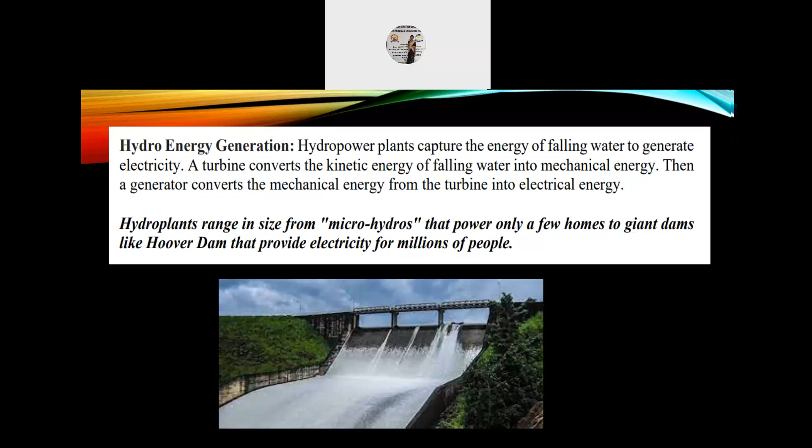Parts of a hydroelectric plant: most conventional hydroelectric plants include four major components. The first is the dam, which raises the water level to create falling water and controls the flow of water. The reservoir that is formed is in effect stored energy.

Number 2, turbines. The force of falling water pushing against the turbine's blades causes the turbine to spin. A water turbine is much like a windmill, except the energy is provided by falling water instead of wind. The turbine converts the kinetic energy of falling water into mechanical energy.

Number 3, generator. Connected to the turbine by shafts and possibly gears, so when the turbine spins it causes the generator to spin also. It converts the mechanical energy from the turbine into electric energy. Generators in hydropower plants work just like the generators in other types of power plants.

Number 4, transmission lines, which conduct electricity from the hydropower plant to homes and businesses.

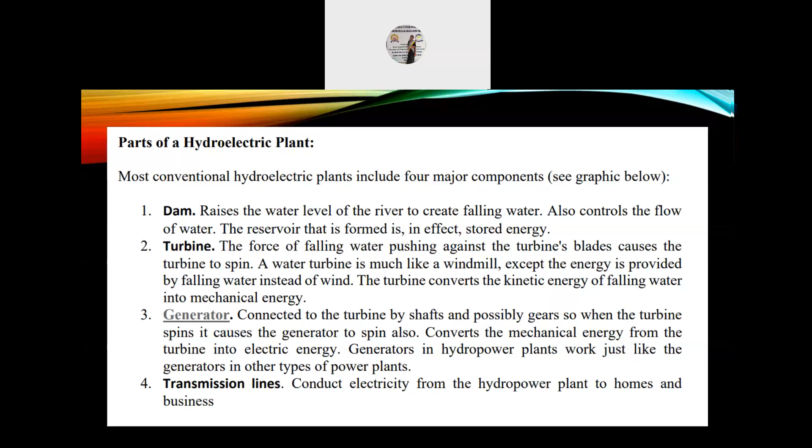How much electricity can a hydroelectric plant make? The amount of electricity a hydropower plant produces depends on two factors: how far the water falls and the amount of water falling.

For how far the water falls, the farther the water falls, the more power it has. Generally, the distance that the water falls depends on the size of the dam. The higher the dam, the farther the water falls and the more power it has. Scientists would say that the power of falling water is directly proportional to the distance it falls. In other words, water falling twice as far has twice as much energy.

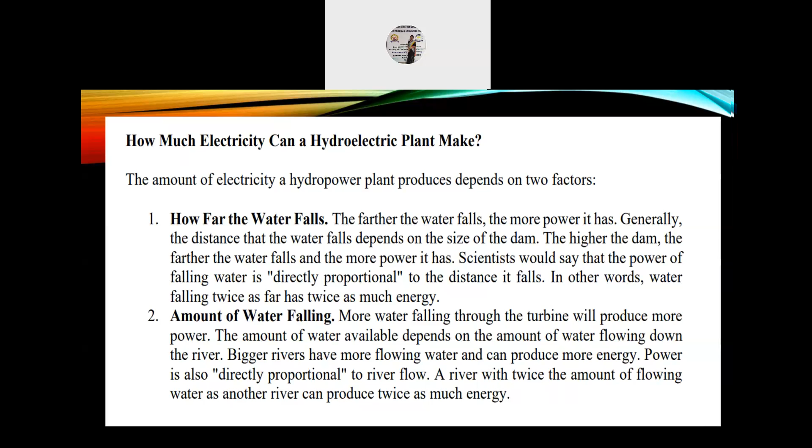Amount of water falling: more water falling through the turbine will produce more power. The amount of water available depends on the amount of water flowing down the river. Bigger rivers have more flowing water and can produce more energy. Power is also directly proportional to river flow. A river with twice the amount of flowing water as another river can produce twice as much energy.

Concentrated solar power systems use lenses or mirrors and solar tracking systems to focus a large area of sunlight into a small beam. Photovoltaic cells convert light into an electric current using the photovoltaic effect.

Photovoltaics were initially solely used as a source of electricity for small and medium-sized applications, from the calculator powered by a single solar cell to remote homes powered by an off-grid rooftop PV system.

Commercial concentrated solar power plants were first developed in the 1980s. As the cost of solar electricity has fallen, the number of grid-connected solar PV systems has grown into the millions, and utility-scale photovoltaic power stations with hundreds of megawatts are being built.

Solar PV is rapidly becoming an inexpensive, low-carbon technology to harness renewable energy from the sun. The current largest photovoltaic power station in the world is the Pavagada Solar Park, Karnataka, India, with a generation capacity of 2050 megawatts.

Wind wave energy generation. Wave energy, or wave power, is the transport and capture of energy by ocean surface waves. The energy captured is then used for different kinds of useful work, including electricity generation, water desalination, and pumping of water. Wave energy is also a type of renewable energy and is the largest estimated global resource form of ocean energy. It is also known as ocean energy or sea wave energy.

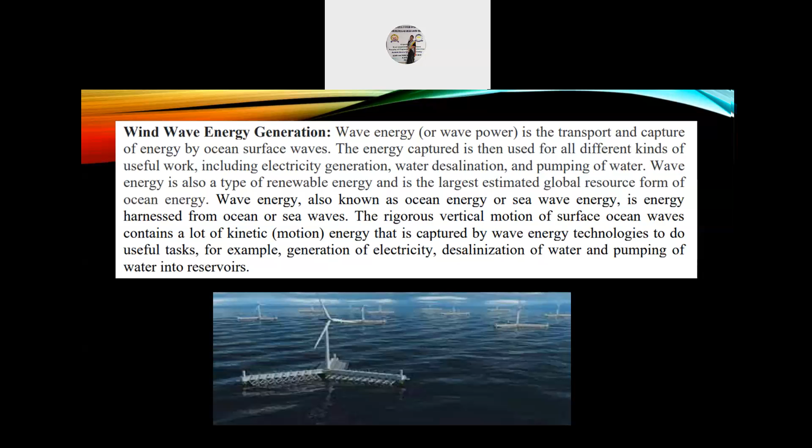It is energy harnessed from ocean or sea waves. The rigorous vertical motion of surface ocean waves contains a lot of kinetic or motion energy that is captured by wave energy technologies to do useful tasks, for example generation of electricity, desalination of water, and pumping of water into reservoirs.

Wave energy, or wave power, is essentially power drawn from waves. When wind blows across the sea surface, it transfers the energy to the waves. They are a powerful source of energy. The energy output is measured by wave speed, wave height, wavelength, and water density. The stronger the waves, the more capable it is to produce power.

The captured energy can then be used for electricity generation, powering plants, or pumping of water. It is not easy to harness power from wave generator plants, and this is the reason there are very few wave generator plants around the world.

There are multiple different technologies used for wave energy, with 5 main types of technology used, including absorbers, attenuators, oscillation water columns, overtopping, and inverted pendulum devices.

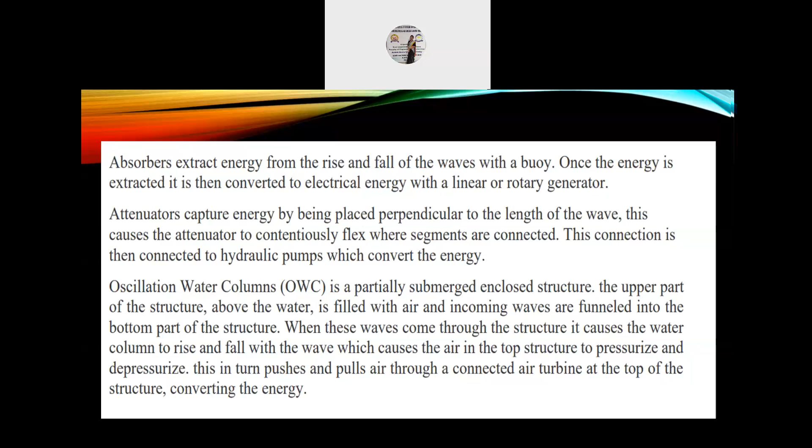When these waves come through the structure, it causes the water column to rise and fall with the wave, which causes the air in the top structure to pressurize and depressurize. This in turn pushes and pulls air through a connected air turbine at the top of the structure, converting the energy.

Overtopping has a wave lift over a barrier which fills a reservoir with water and is then drained through a hydro turbine. This technology is very similar to a conventional hydropower dam.

Inverted pendulum device uses the motion of waves to move a hinged paddle back and forth. The motion of the paddle drives hydraulic pumps, which drive electrical generators.

Next one is tidal energy generation. Tidal power or tidal energy is the form of hydropower that converts the energy obtained from tides into useful forms of power, mainly electricity. Tidal energy has potential for future electricity generation.

Tides are more predictable than the wind and the sun. Among sources of renewable energy, tidal energy has traditionally suffered from relatively high costs and limited availability of sites with sufficiently high tidal ranges or flow velocities, thus constricting its total availability.

However, many recent technological developments and improvements both in design and turbine technology indicate that the total availability of tidal power may be much higher than previously assumed, and that economic and environmental costs may be brought down to competitive levels.

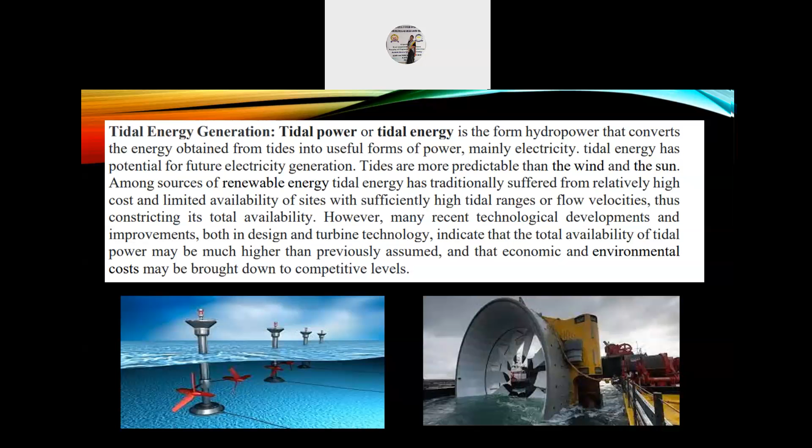Tidal power is taken from the Earth's oceanic tides. Tidal forces are periodic variations in gravitational attraction exerted by celestial bodies. These forces create corresponding motions or currents in the world's oceans.

Due to the strong attraction to the oceans, a bulge in the water level is created, causing a temporary increase in the sea level. So as the Earth rotates, this bulge of ocean water meets the shallow water adjacent to the shoreline and creates a tide.

This occurrence takes place in an unfailing manner due to the consistent pattern of the moon's orbit around the earth. The magnitude and character of this motion reflects the changing positions of the moon and sun relative to the earth, the effects of Earth's rotation, and local geography of the sea floor and coastline.

Tidal power is the only technology that draws on energy inherent in the orbital characteristics of the Earth-Moon system and to a lesser extent in the Earth-Sun system. Other natural energies exploited by human technology originate directly or indirectly with the sun, including fossil fuel, conventional hydroelectric, wind,

biofuel, wave, and solar energy. Nuclear energy makes use of Earth's mineral deposits of fissionable elements, while geothermal power utilizes the Earth's internal heat, which comes from a combination of residual heat from planetary accretion and heat produced through radioactive decay.

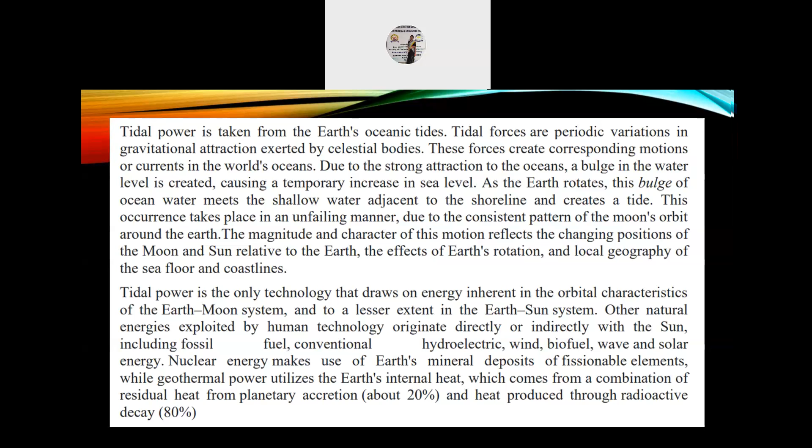A tidal generator converts the energy of tidal flows into electricity. Greater tidal variation and higher tidal current velocities can dramatically increase the potential of a site for tidal electricity generation.

Because the Earth's tides are ultimately due to gravitational interaction with the Moon and Sun and the Earth's rotation, tidal power is practically inexhaustible and classified as a renewable energy source.

Movement of tides causes a loss of mechanical energy in the Earth-Moon system. This is the result of pumping of water through natural restrictions around coastlines and consequent viscous dissipation at the seabed and in turbulence. This loss of energy has caused the rotation of the Earth to slow in the 4.5 billion

years since its formation. During the last 620 million years, the period of rotation of the Earth has increased from 21.9 hours to 24 hours.

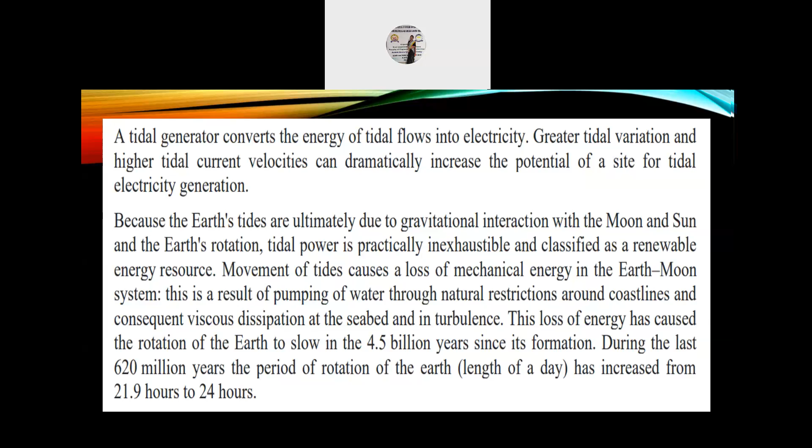The last one, geothermal energy generation. Geothermal energy is the thermal energy generated and stored in the earth.

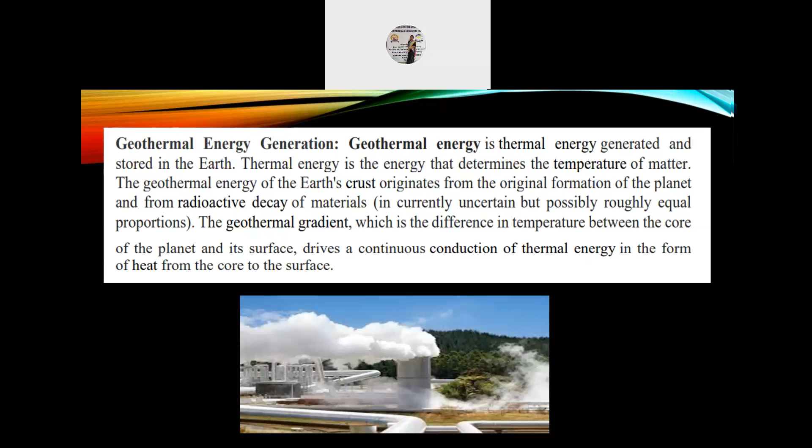Thermal energy is the energy that determines the temperature of matter. The geothermal energy of the earth's crust originates from the original formation of the planet and from radioactive decay of materials. The geothermal gradient, which is the difference in temperature between the core of the planet and its surface, drives the continuous conduction of thermal energy in the form of heat from the core to the surface.

Geothermal power is cost-effective, reliable, sustainable, and environmentally friendly, but has historically been limited to areas near tectonic plate boundaries. Recent technological advances have dramatically expanded the range and size of viable resources, especially for applications such as home heating, opening a potential for widespread exploitation.

Geothermal wells release greenhouse gases trapped deep within the earth, but these emissions are much lower per energy unit than those of fossil fuels. The Earth's geothermal resources are theoretically more than adequate to supply humanity's energy needs, but only a very small fraction may be profitably exploited.

Drilling and exploration for deep resources is very expensive. Forecasts for the future of geothermal power depend on assumptions about the technology, energy prices, subsidies, plate boundary movement, and interest rates.

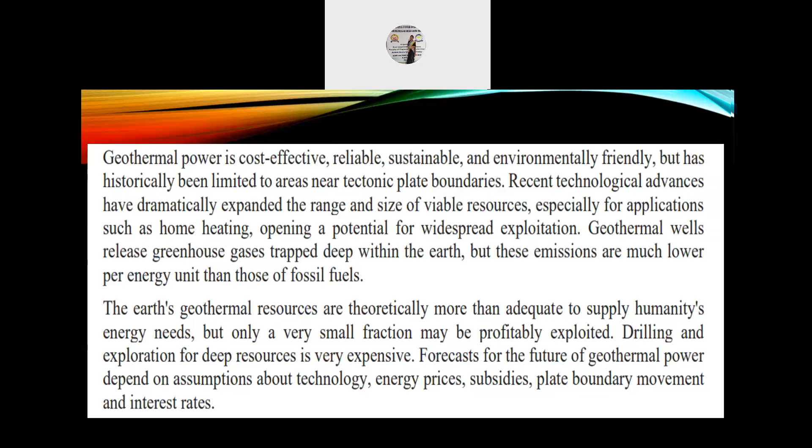The last topic is water provisioning. Provisioning services are ecosystem services that describe the material or energy outputs from ecosystems. They include food, water, and other resources.

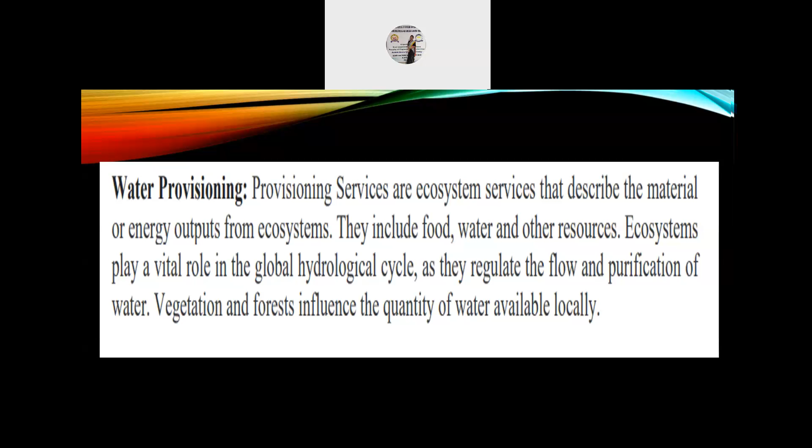Ecosystems play a vital role in the global hydrological cycle as they regulate the flow and purification of water. Vegetation and forests influence the quantity of water available locally.

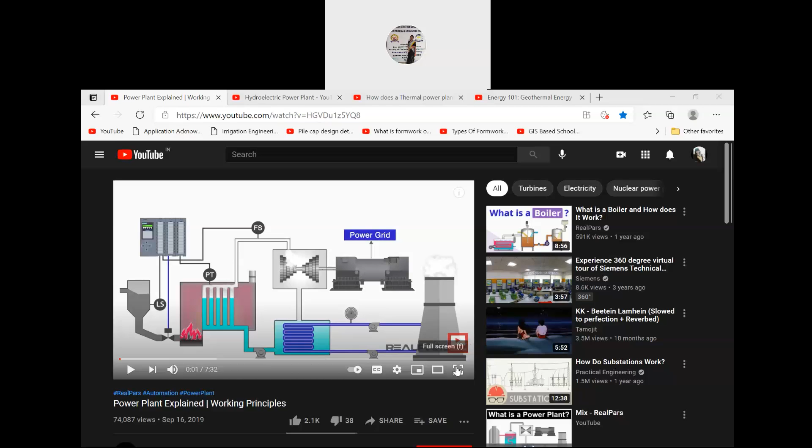Today, we are going to look at what a power plant is, different types, and why automation is important in the power plant business.

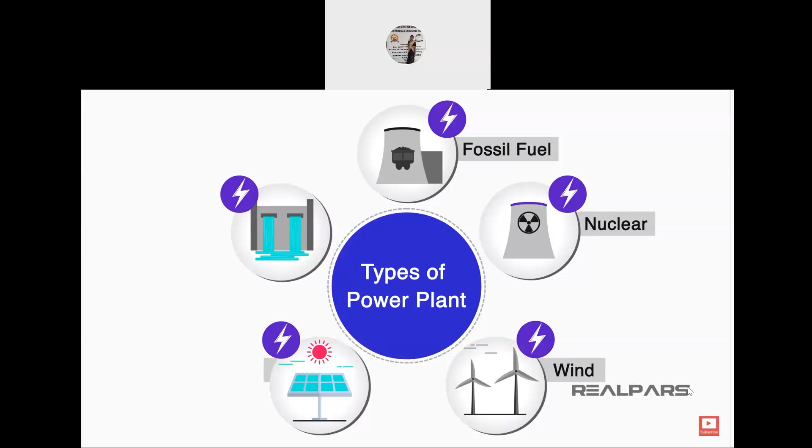In its simplest form, a power plant, known also as a power station, is an industrial facility used to generate electricity. To generate power, a power plant needs an energy source. One source is the burning of fossil fuels, such as coal, oil, and natural gas. Then we also have nuclear power. And finally, renewable energy sources, such as wind, solar, wave, and hydroelectric.

Originally, the only source of power was direct current, or DC systems. But it wasn't until alternating current, or AC systems were introduced that the power could be carried the distances necessary to be suitable for distribution to the masses.

Hydroelectric power plants generate power by converting the force of water to turn large generators. Hydroelectric power plants fall into 3 different categories. First up is impoundment. An impoundment facility typically uses a store of river water from a dam in a reservoir. When water is released from the reservoir, it flows through a turbine, which generates motion. This turning motion activates a generator to produce electricity.

Next up, we have diversion. A diversion is fairly similar to an impoundment facility, but may not need the use of a dam, and instead works by channeling a portion of a river through a canal or a penstock.

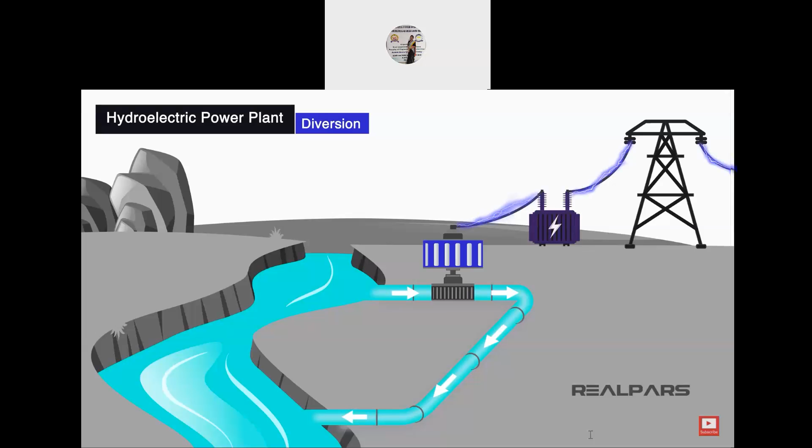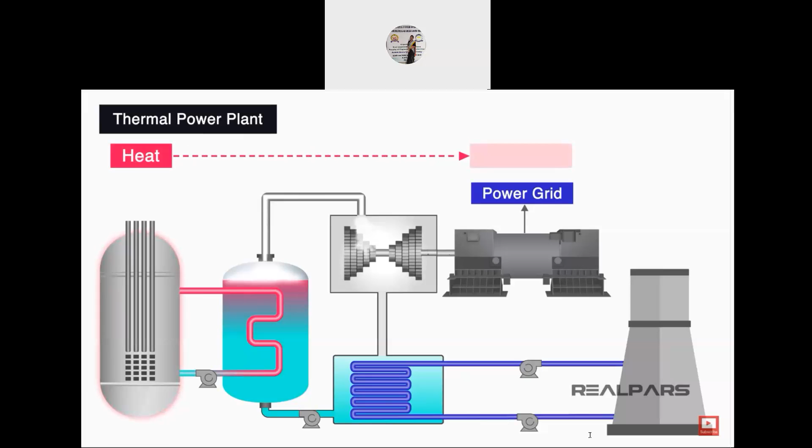Thermal power plants generate electricity by converting heat into electricity, essentially by burning a fuel. One example of this is a nuclear power plant. Nuclear power plants use reactors' heat to turn water into steam. The steam is then sent through a turbine, which, as we've already learned, generates movement of a generator, which in turn generates electricity.

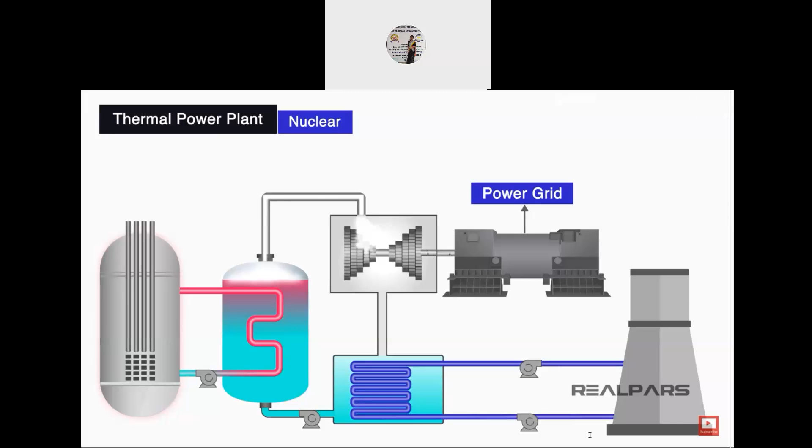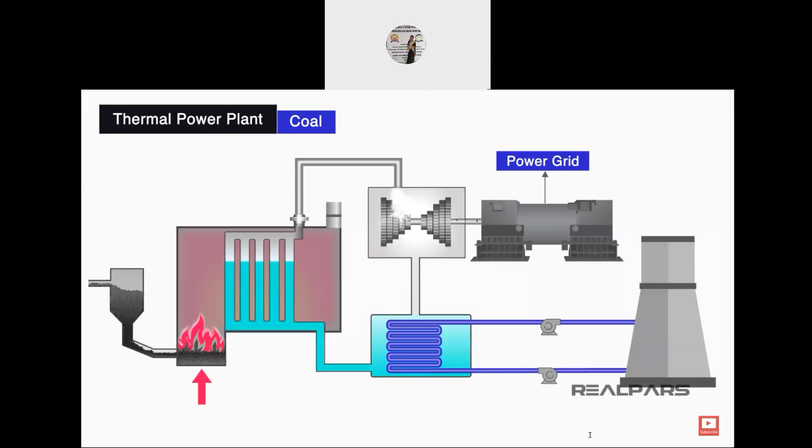A coal power plant works in much the same way, but instead of a nuclear reactor heating water to make steam, the heat from the burning coal powers a steam turbine.

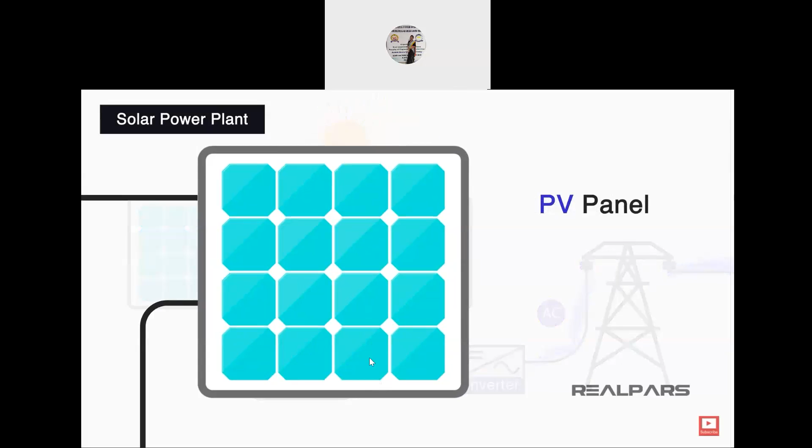The next type of power plant we will look at is a solar power plant. This type of plant uses the sun's energy to convert into electricity. This is achieved by using photovoltaic, or PV, panels, made up from a number of semiconductor cells that release electrons when they are excited by the light energy of the sun. Solar energy is one of the cleanest ways of generating electricity.

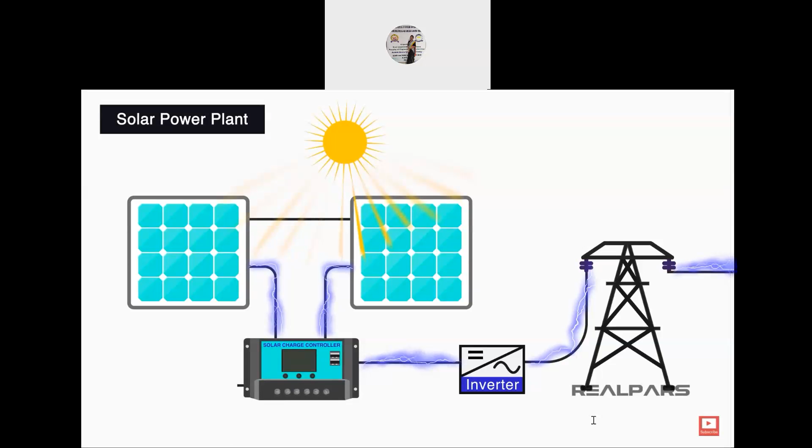The solar panels get connected to the grid and can be used to supplement a thermal power plant's resources. They can be used in domestic environments too, and with the aid of batteries, can reduce households' energy consumption drastically without burning any fossil fuels.

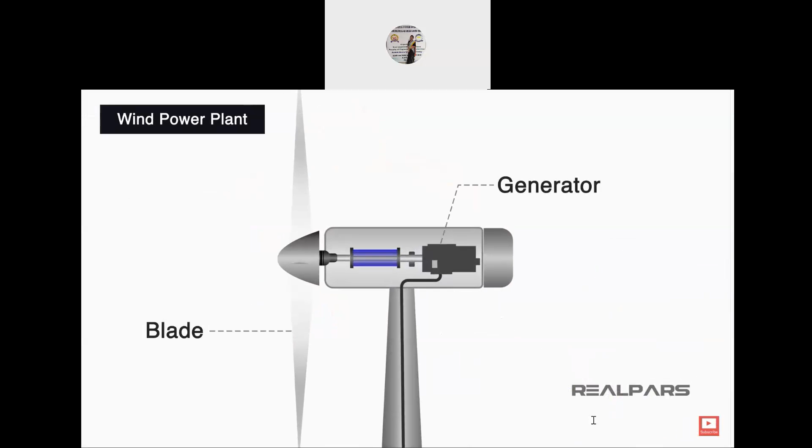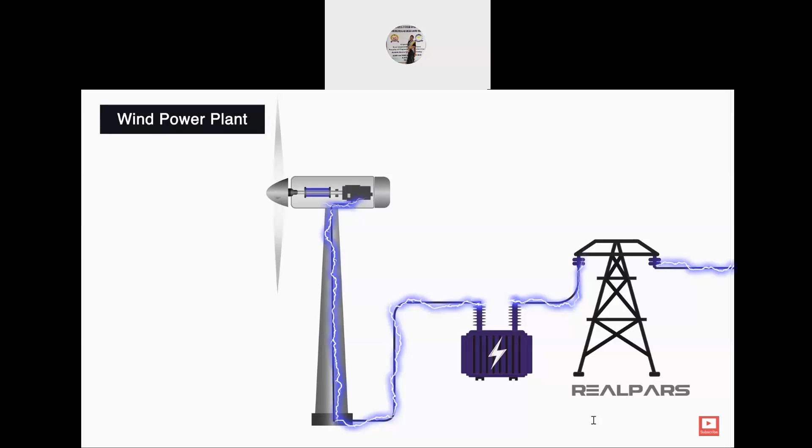Last but not least, we have wind power plants. Wind power plants, or wind turbines, get their energy from the wind by connecting a generator to the blades. The rotational movement of the blades, caused by the wind, powers a generator. Like solar power, they are a clean source of energy, but require much more hardware to work effectively, and with many more parts, are more likely to fail.

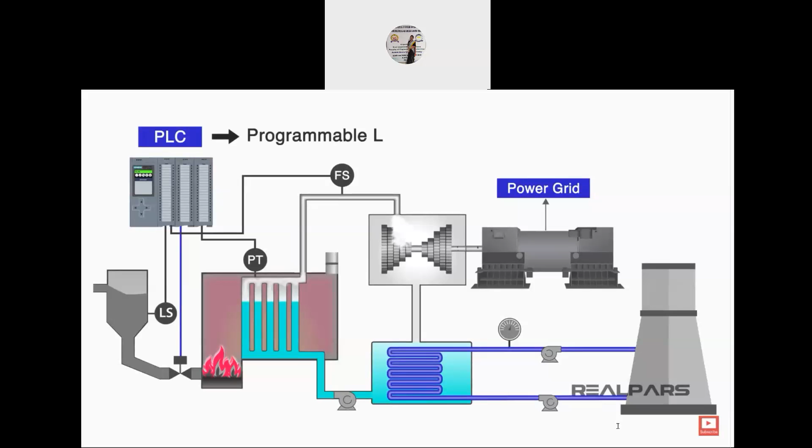Like many things nowadays, power plants are controlled using a PLC, Programmable Logic Controller, or DCS, Distributed Control System. The ability for condition monitoring of all the plant items enables us to determine what is running efficiently and what could fail. This enables us to proactively maintain plant equipment before it fails, rather than reactively fixing broken equipment.

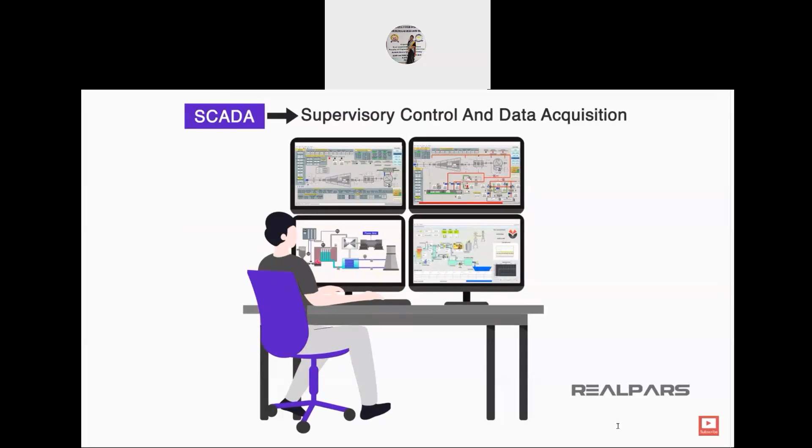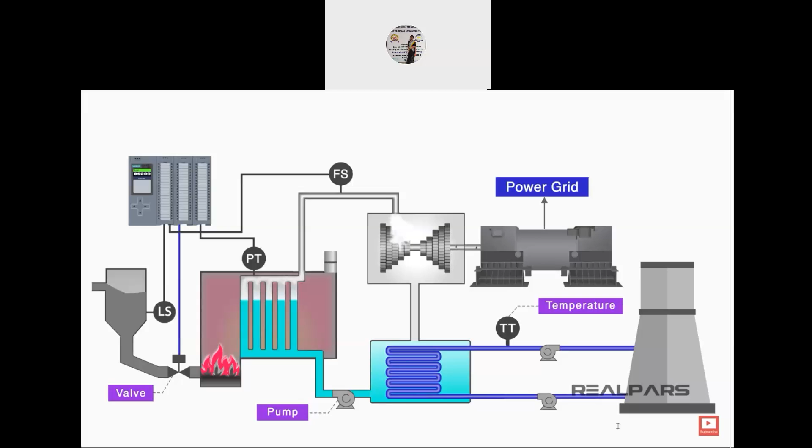From within a control room, a full SCADA, or supervisory control and data acquisition system, can monitor and control temperatures, speeds of pumps and motors, and open and close valves. This can be especially useful in the case of fossil fuel burning plants, where the precise control of system devices can increase the plant availability.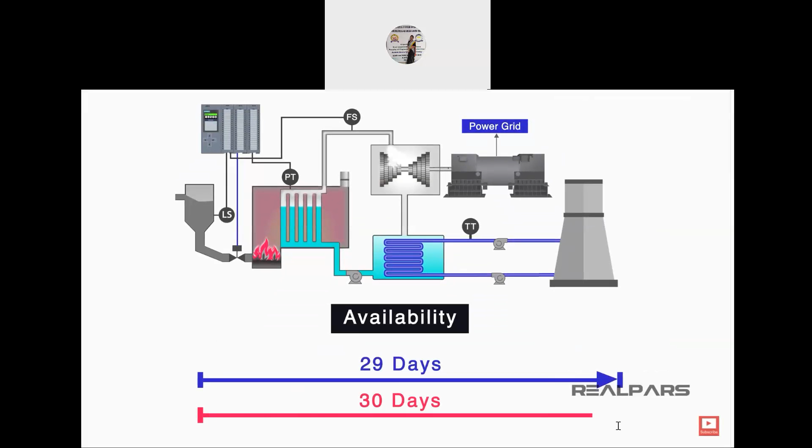Availability is the amount of time that the plant is able to produce electricity over a certain period of time, divided by the amount of time in the period, which is often a key performance indicator, or KPI. This also ensures the most efficient use of the plant, which maximizes power generation.

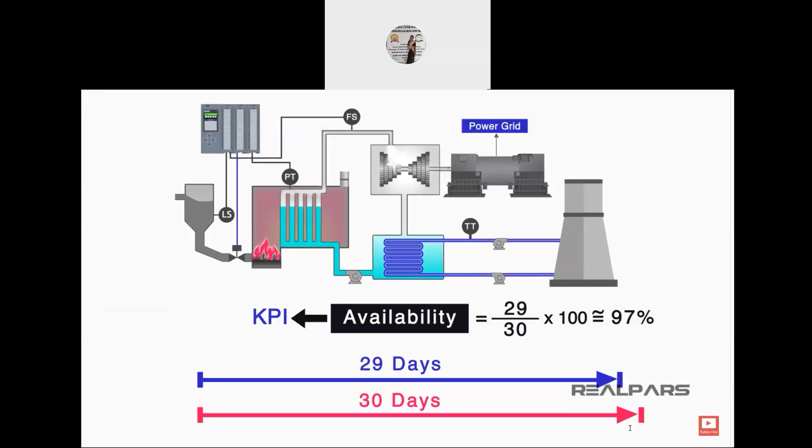By monitoring the demand and trending at which times of the day the demand is highest, plants can adjust the speed of pumps automatically according to the time of day, something that wouldn't be possible without the use of an automation control system.

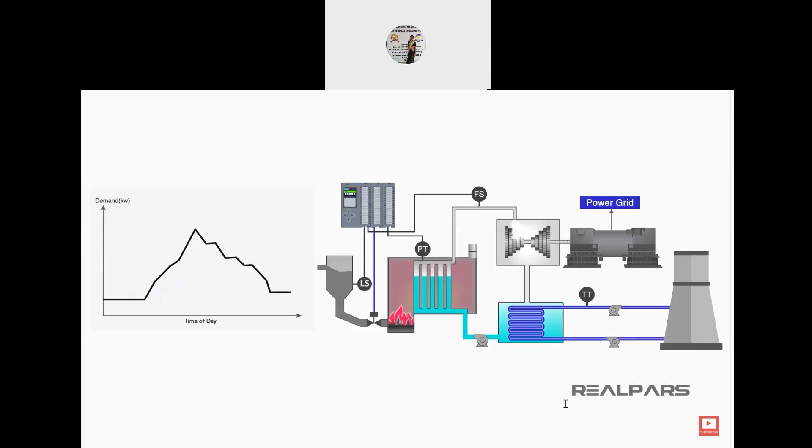That's it for this video. I hope you enjoyed learning about the different types of power plants and how we use automation to make them more efficient.